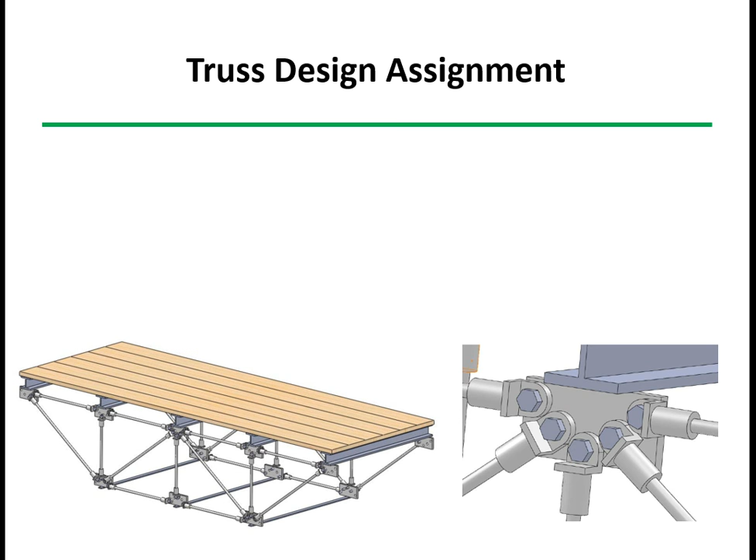Now that we have some background in the design of compression members, let's look at this week's lab assignment. What you're supposed to do is select the members for this truss. The goal is to make this truss as light as possible, so you want to pick the smallest diameter possible of circular cross-section steel bars.

Another limitation is that you want the diameters to be in even 1/8 inch increments, and we're using A36 steel. The detail shows how a joint on this truss is made. So as with all trusses, pinned ends, so your K value when you look at buckling is going to be 1, and you also know that there's no bending in the truss members, they're only tension or compression.

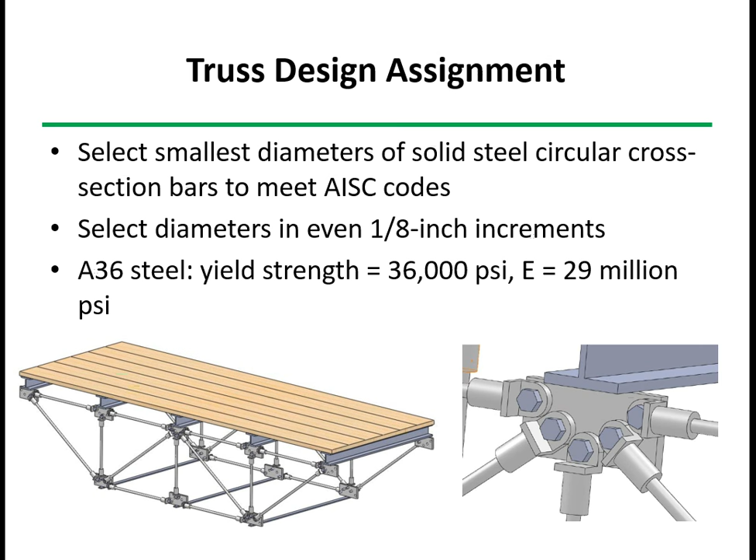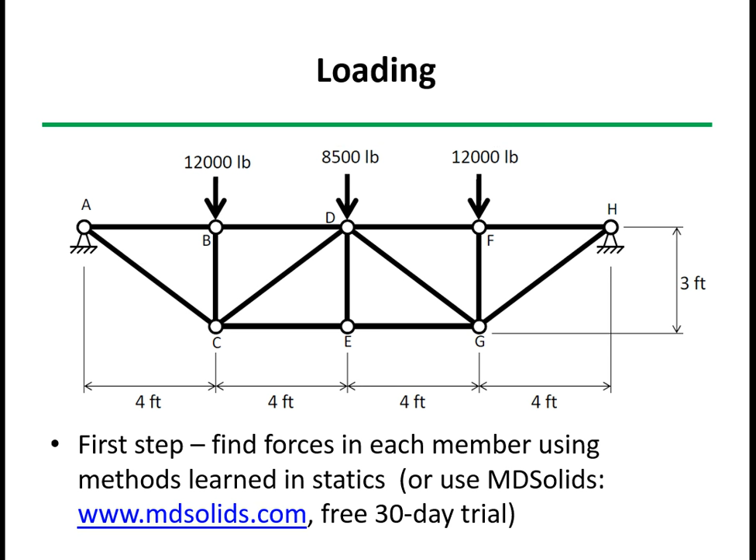So if you remember from statics, your first step here is going to be to find the force in each member, whether it's tension or compression. You can either work through it using the method of joints, or if you'd like to try software called MDSolids, you can install that free for 30 days.

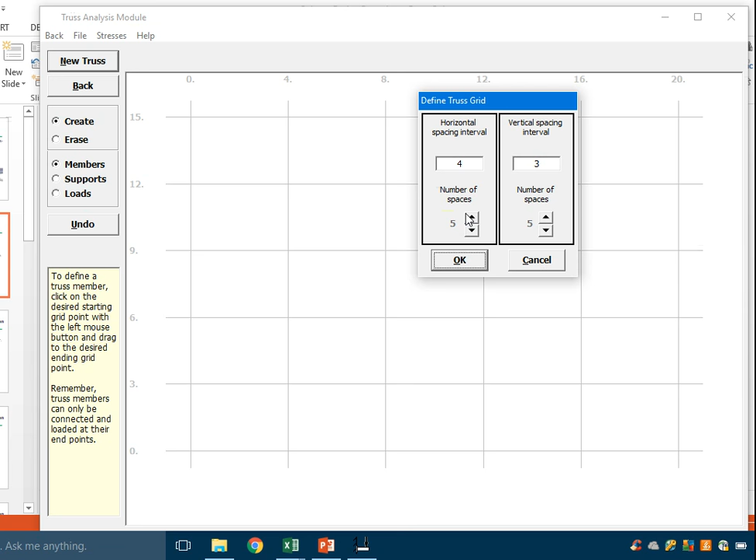I'll show you really quickly how we would do that. Pick the truss module, and when you select a new truss, you make the spacing. Horizontally, your truss are 4 feet joint to joint, and vertically 3 feet. The number of spaces that you pick is not really important unless you just want to get the perspective right. So to create members, you simply drag and drop.

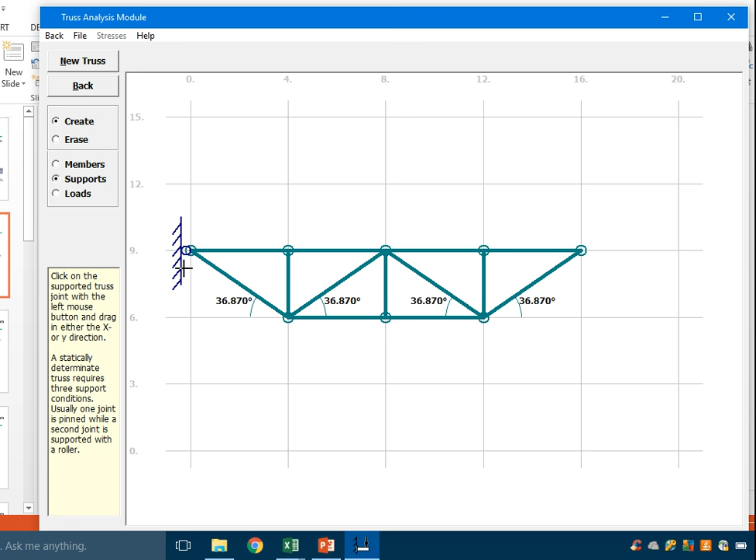And so there's our finished truss. You add supports by clicking next to the joint. If I click once, that makes it a roller joint. Click in the other direction, that makes that a pin. And on this end, we just have a roller.

To put the loads on, I'll just put one of them on. Click right below the joint if you want it to be down, like this one. We'll put 12,000 pounds, and of course you're going to put the other 12,000 and 8,500 on this.

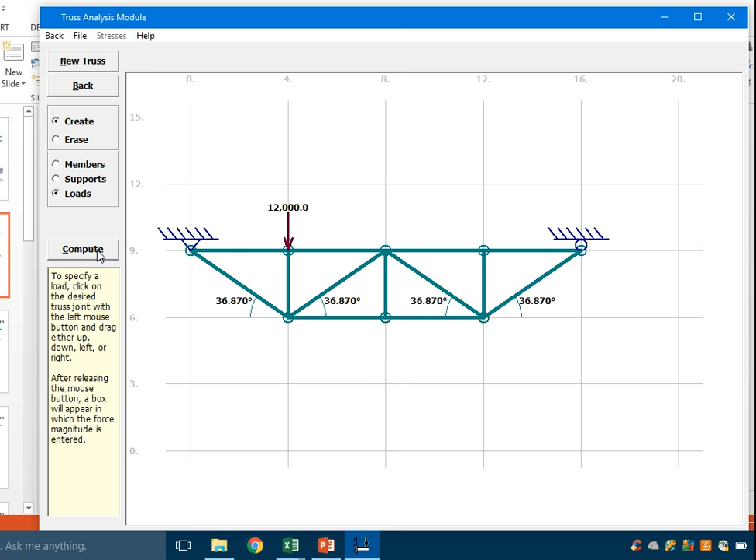Once you get the truss the way you want it, click Compute, and it'll show the forces, it'll show the reaction forces as well as the force in each member and whether it's tension or compression. Pretty handy tool.

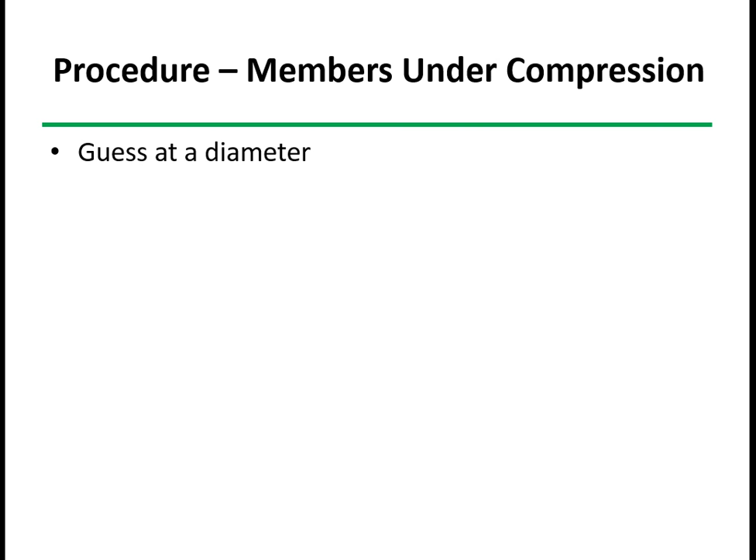Now, once we know the force in every member, let's talk about how to size them. First of all, if you have a member that's under compression, you have to do an iterative process. We'll guess at a diameter, and once we have that diameter, we'll calculate the area as well as the radius of gyration. Remember, the radius of gyration is defined as the square root of the moment of inertia divided by the area. For a circular cross section, that comes out to be d over 4.

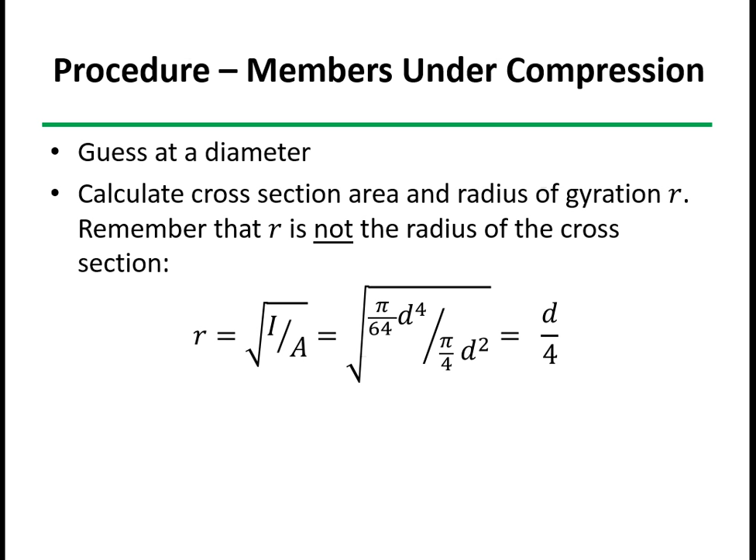So it's not the radius of the circle. The radius of gyration is the diameter divided by 4. And from there, you calculate the slenderness ratio. We've used the symbol lambda here for KL over R. And remember, K, as we said, for a truss member, is always going to be 1.

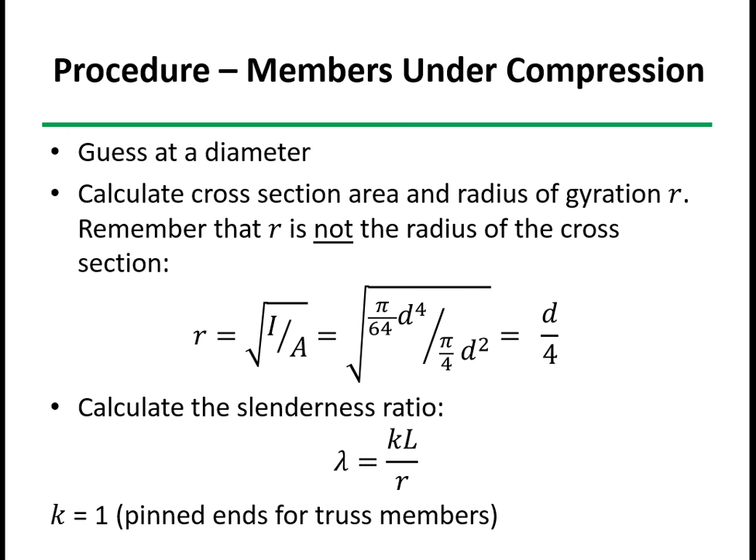Now you can calculate the stress, it's just P over A, and look at the slenderness ratio. We talked in the last video about the critical value of the slenderness ratio. What you have to decide is whether the design you've picked, the diameter you've picked, puts this into a short or long column.

So we'll say if we are in a long column, then what you do is simply come up with the design allowable using the factor of safety of 23 over 12, or 1.92. So you calculate the allowable stress directly like that.

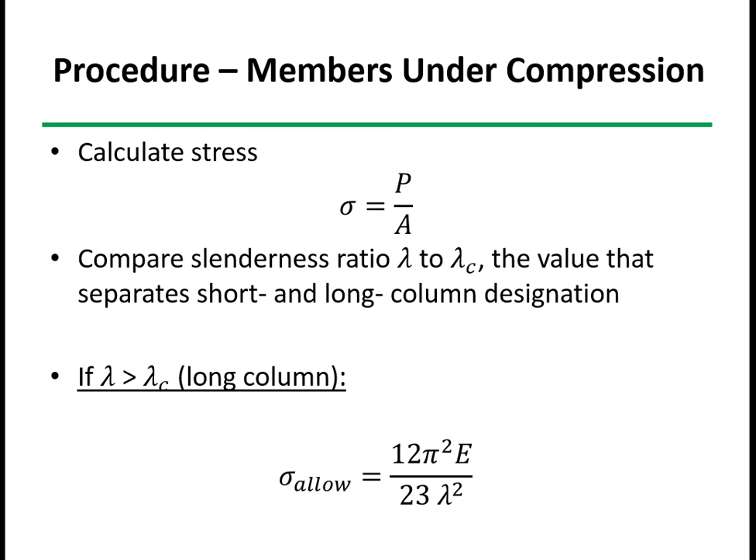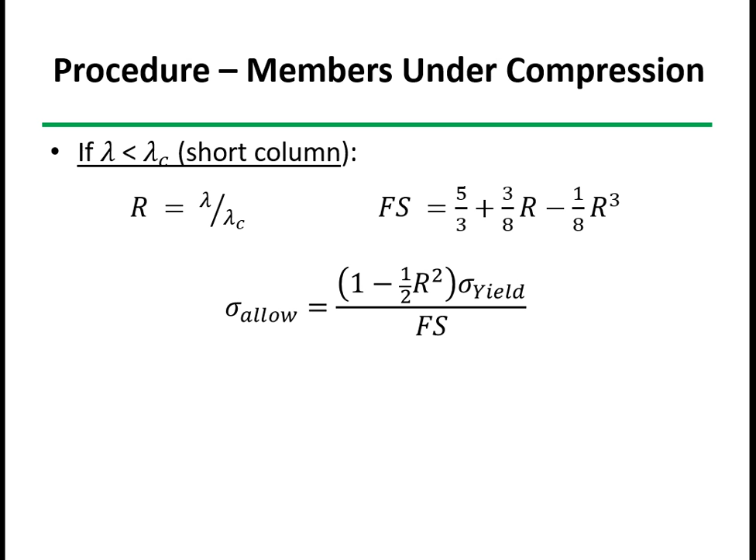On the other hand, if it's a short column, you have one additional step, and that is you have to find the factor of safety, which, as we said, varies from 1.67 to 1.92. So if we define R as our slenderness ratio divided by the critical slenderness ratio, there's our equation for the factor of safety, and then here's our equation for the allowable stress.

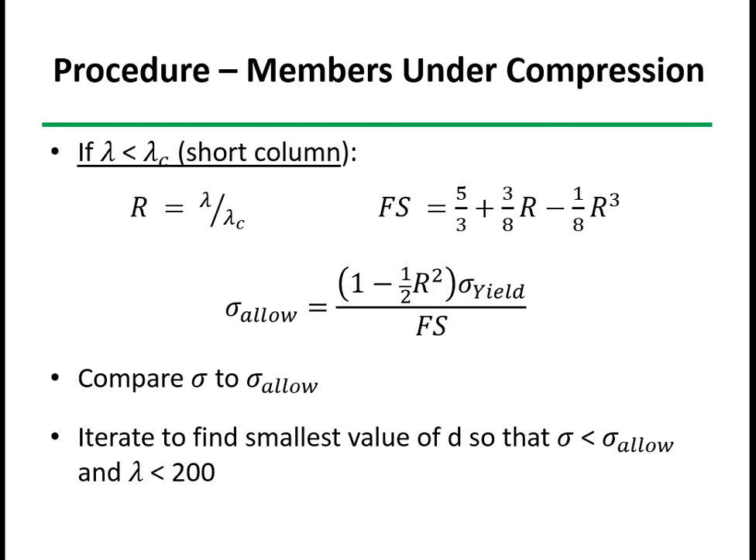In either case, once we found the allowable stress, we compare our P over A stress to that, and then we iterate. So if our stress is too high, we know we need to make the diameter bigger. But if it's acceptable, then we may want to try a smaller value until we find the smallest value that meets our requirements, both for the stress and for the fact that the slenderness ratio by code cannot be greater than 200.

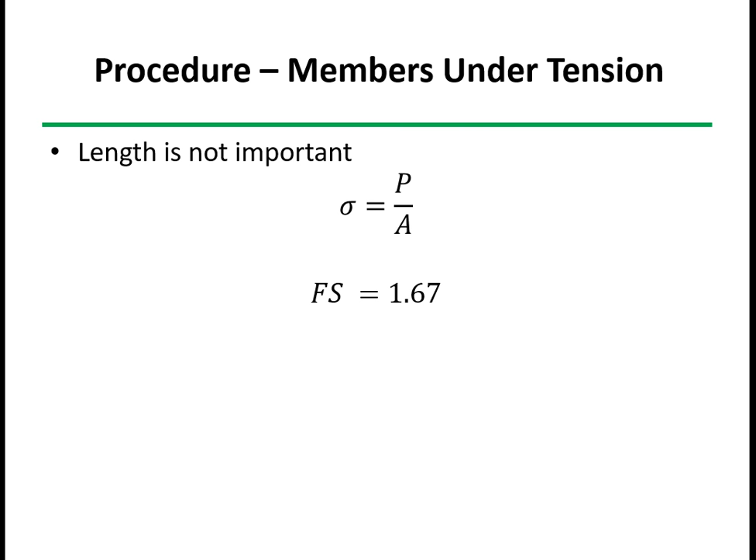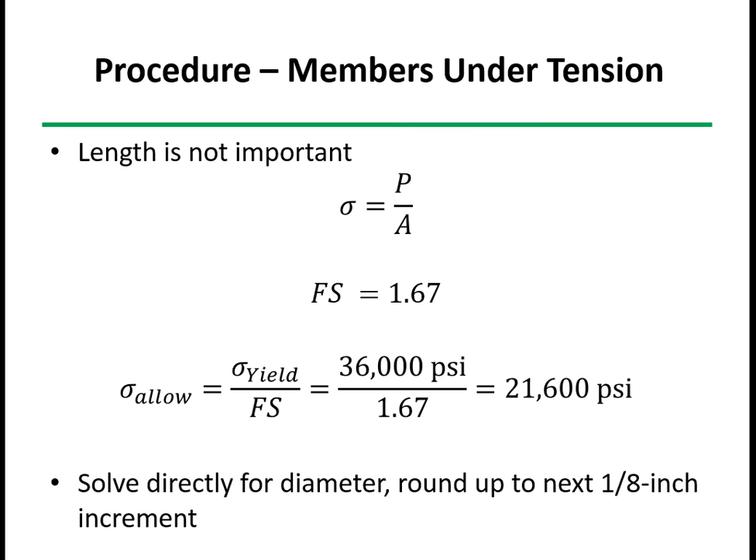Now, if a member's under tension, it doesn't matter how long it is. We still have the same equation for stress, and the factor of safety is 5/3 for this, which makes our allowable 21,600 psi. So no iteration is needed here. You can just solve directly for the diameter, but remember to round that up to the nearest 1/8 increment.

And so I'll show you 3 examples here. In the first one, we've got a length I've just arbitrarily picked, 72 inches. We're putting it under compression, 20,000 pounds. In the second one, we'll look at a length that's half of that. And in the third one, even though we don't need the length, we'll look at a tension member.

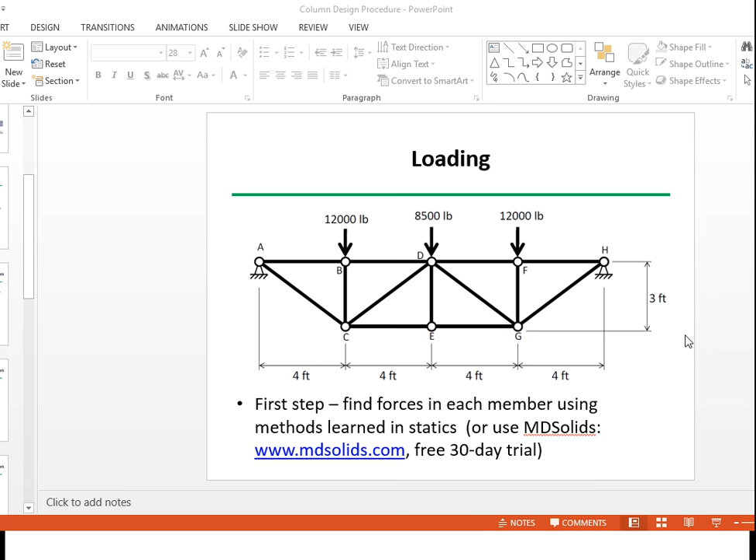So here's a spreadsheet that I've set up to analyze the compression members. You can see we put in a guess for a diameter, calculate the area, calculate the radius of gyration, and in this case the slenderness ratio becomes 288.

So we know that's not going to work right away. I've used some if statements here to say if things are good or bad, and we can't go over 200, so I know I'm going to have to make this bigger. But also we calculate the KL over R and compare that to the critical value.

In this case, it's greater than the critical value, so it's a long column. Now we calculate both the allowables for short and for long column, but based on the fact that this is long, this is the allowable stress that I'll use to compare to this stress. And of course, the stress is too high, and the slenderness ratio is too high.

So let's go up, say, to 1.5 inches. Okay, slenderness ratio is okay now, but our stress is still too high. 1.75 — again, stress is still too high. 2 inches now, everything's okay.

Let's see if we can go down 1/8. And no, we can't. So 2 inches is the best design for that particular member.

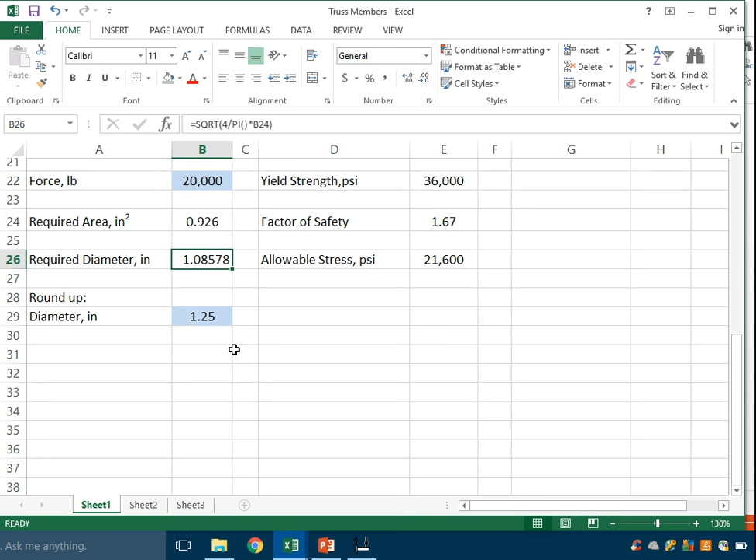So when you make your spreadsheets, again, I found that if statements work really well to decide whether it's long or short and which allowable to use.

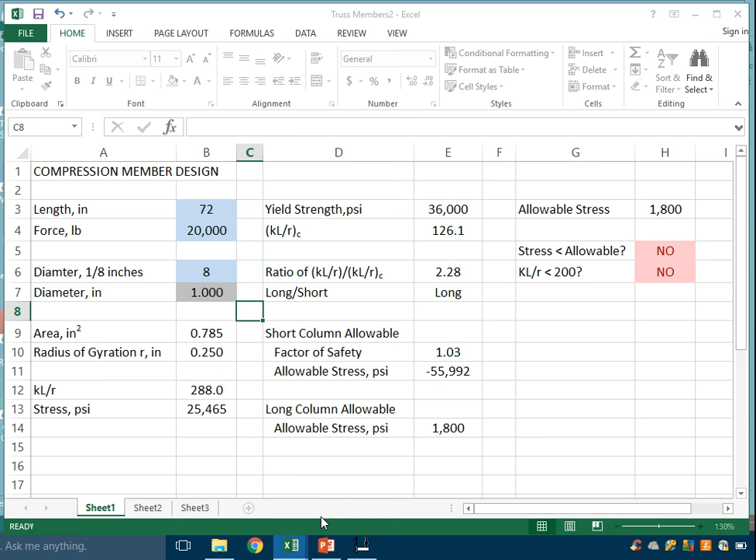Now, if you get a little more ambitious, you can actually use Solver to do this. Because we want this to be in even 1/8 increments, we added another cell here for the diameter in 1/8 increments. This is just an equation that takes that number and divides it by 8.

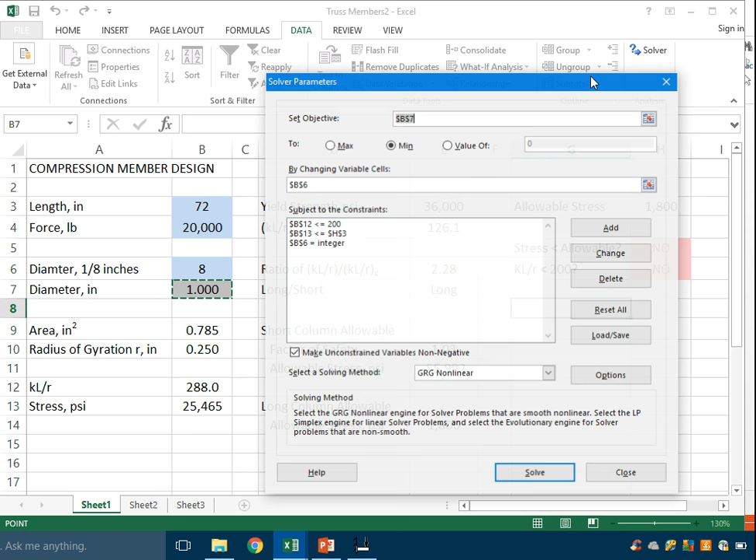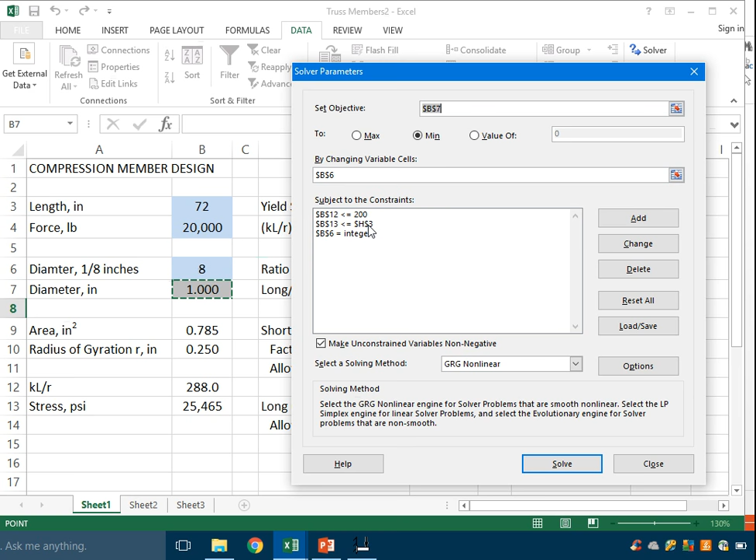So what I'll do with Solver, I have the model set up such that I want to minimize that diameter by changing the number of 1/8 increments, subject to the constraints that we want the KL over R value to be less than 200, we want the stress to be less than the allowable stress, and we want this number to be an integer.

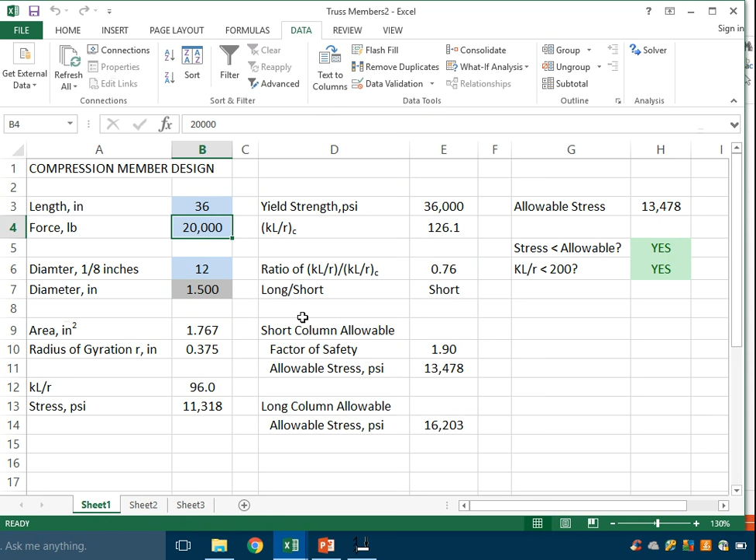And you can see for that first example, we come up with our 2-inch diameter, and 1.5-inch diameter for the shorter column.

You can do a similar thing here too with the tension member design, in that instead of looking at this number and rounding it up, you can have Excel do that for you automatically. I'll let you try to figure out how to do that.

So for example, I change this to 25,000. There's my calculated diameter, and I'll take this number and round it up.

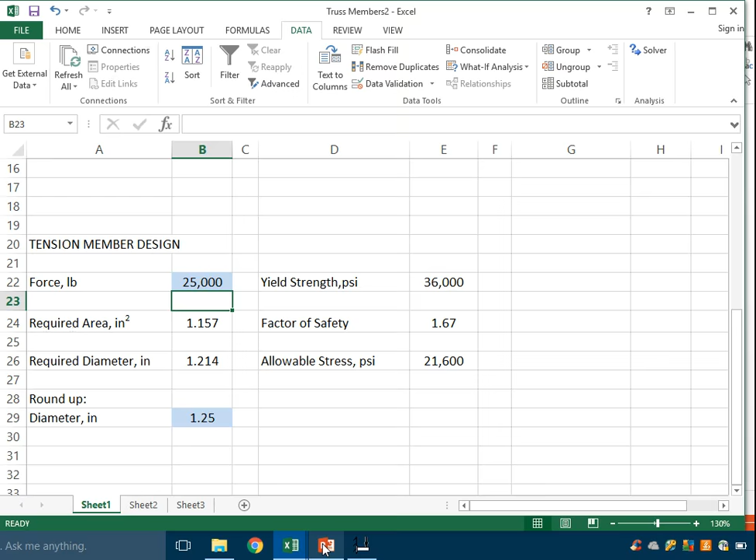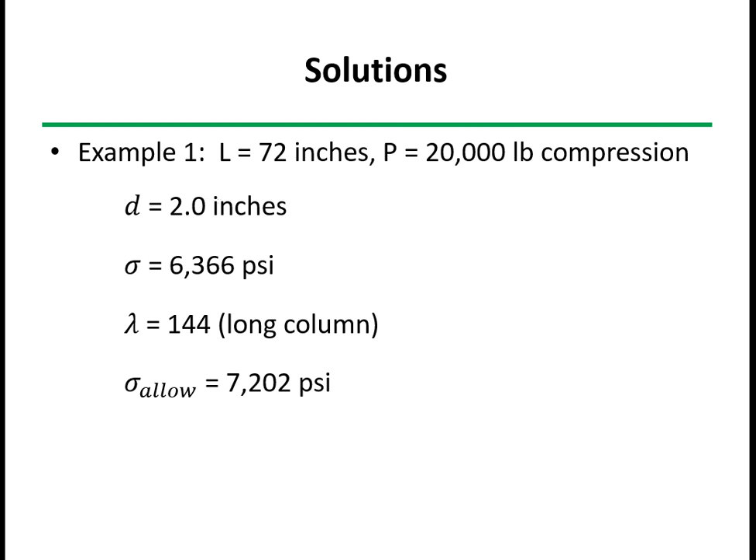So again, these are the solutions if you want to use them to check your spreadsheet: 2 inches for the first case, 1.5 inches for the second, and 1 1/4 inch for the tension member.

So now your assignment — you're not writing a full lab report, but you are writing an abstract and turning that in along with your Excel sheet and your sample calculations. So you want your spreadsheet turned in along with the results document, which will have the abstract and the supporting calculations.

And from your course pack as well, a little bit of instructions about an abstract. Keep it short, 100 to 200 words. You're not going to write a whole report in this case, but in any case, you always want the abstract to essentially be standalone.

That you can read the abstract, get the gist of what's in the report, and then decide if you want to go deeper into the report. Make sure you include numerical results as well. You don't have any figures or tables within the abstract — it should be all text. And if you have other portions of the report, you don't refer to them in the abstract either.

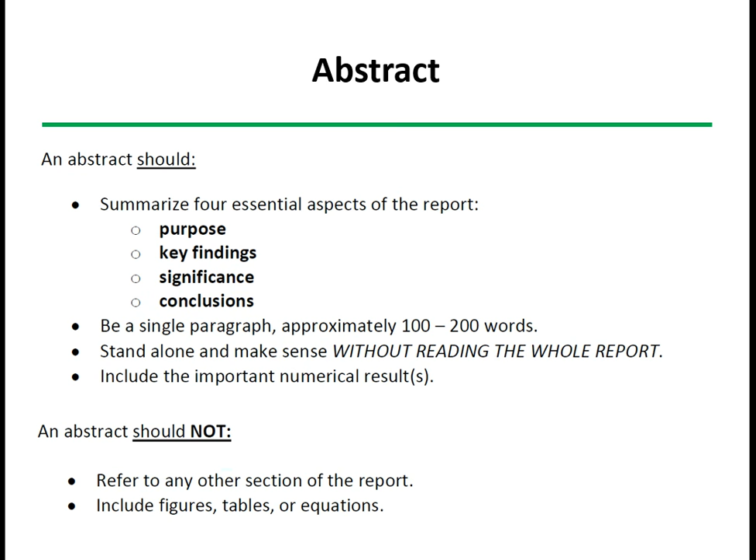And a little bit more about the abstract when you read it — see if you can answer the questions that are shown there. Okay, that's about it.